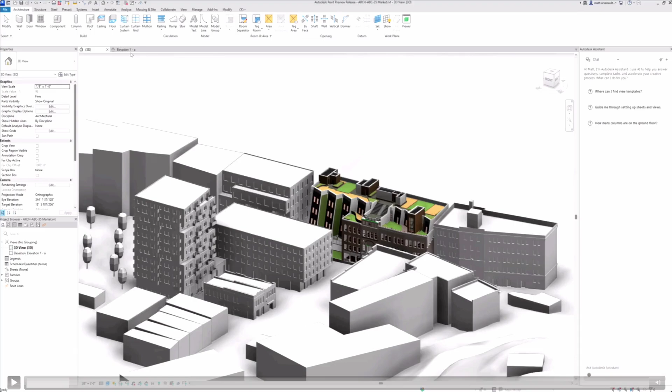So in this case, I'm going to ask it to tell me the window to wall ratio of the building in my north facade. Autodesk Assistant is going to go in, do its calculation, and return back around 19%. The next thing I'm going to ask Assistant to do is more of a do-it-for-me use case, or design-with-me use case. In this case, I'm going to ask Assistant to take all these windows, we didn't like the 19%, and modify them to double hung windows with slightly larger dimensions so that we're able to get a little bit more sunlight.

Behind the scenes, Autodesk Assistant is taking this prompt, routing it to one of our AI agents, which has a number of MCP servers behind it. It's calling an LLM, which helps decide which MCP server and tool to use, which in turn calls one of the product APIs.

So Assistant's going to try different things, and just like that, all my windows were modified. So this is really powerful, especially for users like me, who are not an expert at Revit, but I'm able to go in, use natural language, and make all these modifications.

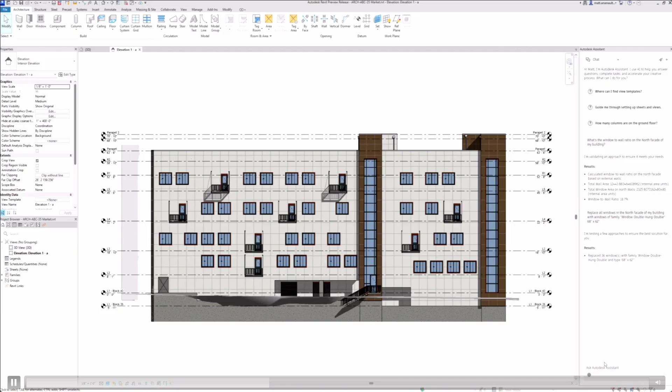The next thing I'm going to ask the Assistant to do is help me with some of my workflow documentation type work. So once a model is complete, there's a lot of work, a lot of manual work that goes into making it ready to be distributed to other contractors or architects to kind of take the design forward.

So the first thing I'm going to ask the Assistant to do is create a floor plan view of my building. So it's going to go in, create a new sheet of my floor plan. It's a little bit messy, so we need to clean it up. Next, I'm going to ask the Assistant to apply a view template on top of this, and also help me annotate some of the doors, windows, and walls.

So going to ask the Assistant to do that, let it run, and Assistant's going to go in, look at my current sheet, identify all those objects, and create a new view that has all those different annotations. So we're almost done. The last thing I'm going to ask Assistant to help me with is create a cover sheet with this view. So cover sheet has a lot of our company standards, the numbering, naming, etc. So that's the last step before we're able to share it with others.

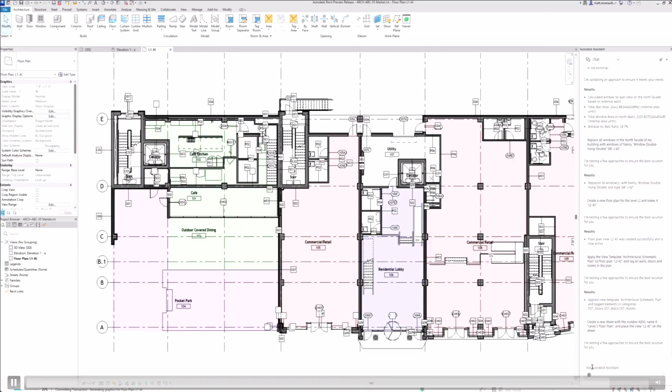So just like that, I was able to go from taking an existing model, being able to ask questions about it, be able to modify it through natural language, and then get it into a state that is ready to be shared with others.